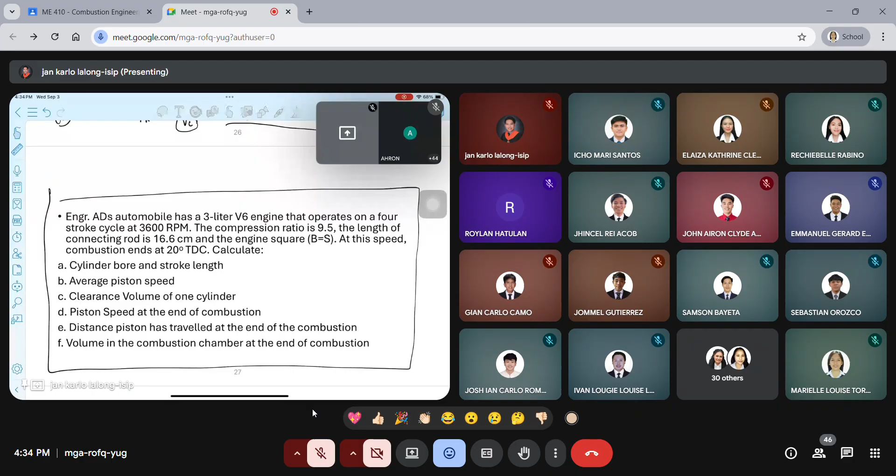Okay, so we have the operating characteristic of reciprocating internal combustion engine. Before we proceed with the analysis ng ating internal combustion engine, una muna nating aalamin ano ba yung mga important parts, ano yung mga parts and terminology na dapat alam natin so that we can easily read kung ano yung mga formula natin gagamitin kapag pinag-usapan natin ang internal combustion engine.

Okay, so let's start. Ang ating mga terms na alamin is in our piston cylinder. Yung ating combustion is nangyayari sa ating piston cylinder, dito nagaganap yung ating combustion, kaya naman this will be the focus ng ating discussion. Okay, so una natin is the bore. Yung bore natin, yan yung tawag sa inner diameter ng ating engine cylinder. Kung makikita natin yung ating engine cylinder, ang bore niya ay yung diameter niya.

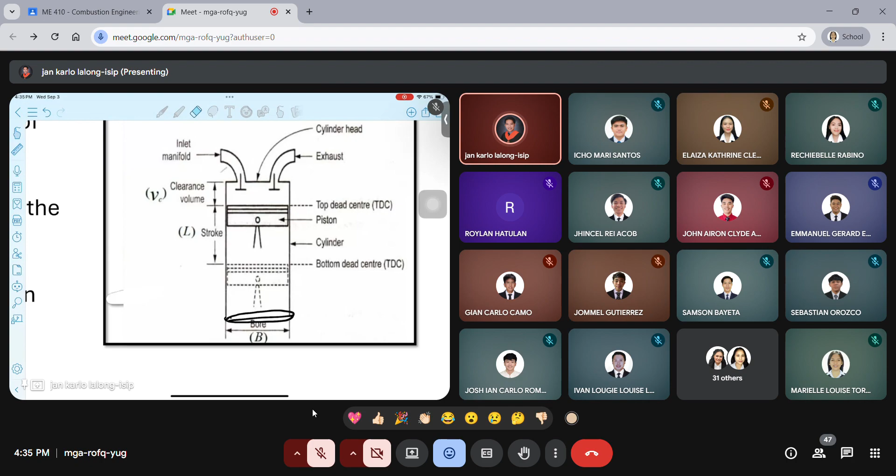So 'di ba cylinder 'yan? Kung ano man yung diameter niyan, yan yung tawag natin diyan ay bore. Naintindihan naman yung sa bore, na-visualize yung ating bore. Basta yun yung ating diameter nung cylinder natin, inner diameter. So it is measured inside ng ating piston cylinder.

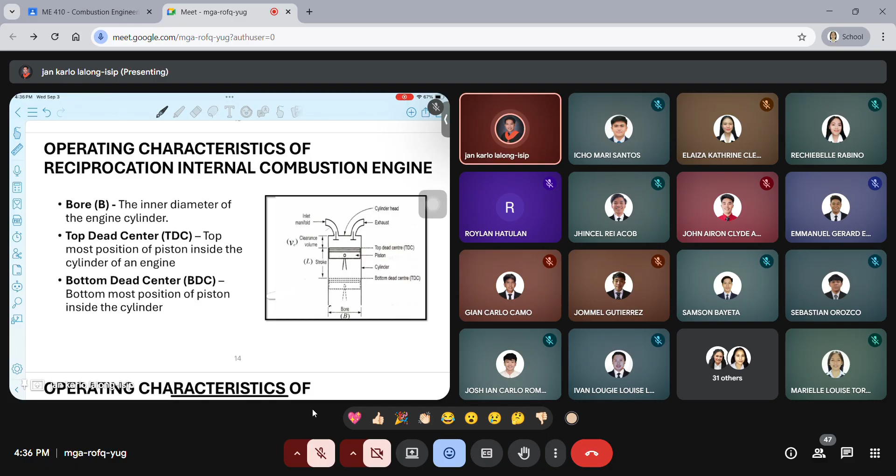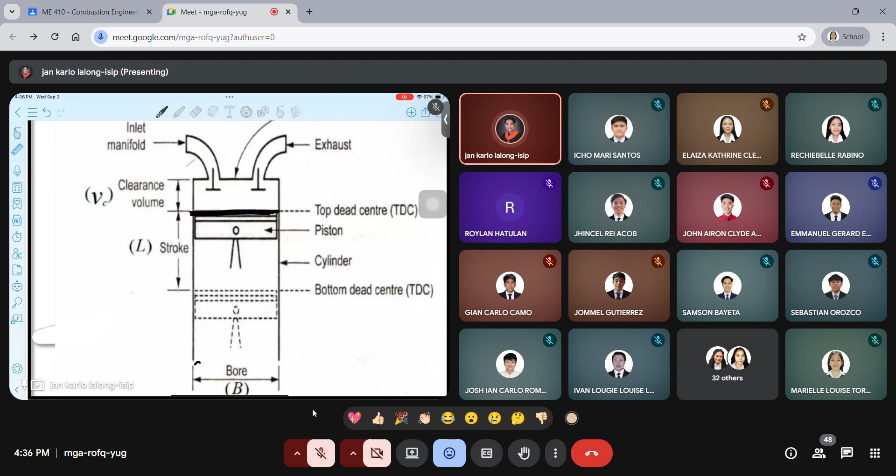Okay, so next nating term, we have the top dead center. Pag sinabi nating top dead center, that is the topmost position ng piston inside the cylinder of an engine. Ganito yung ating piston cylinder, and then we have 4-stroke: intake, compression, power at saka exhaust. Kapag yung ating piston is at top, nasa pinakasagad, topmost position natin, nare-reach yan during compression and our exhaust stroke. Kapag nandyan yung position niya, that is called our top dead center, that is the TDC position.

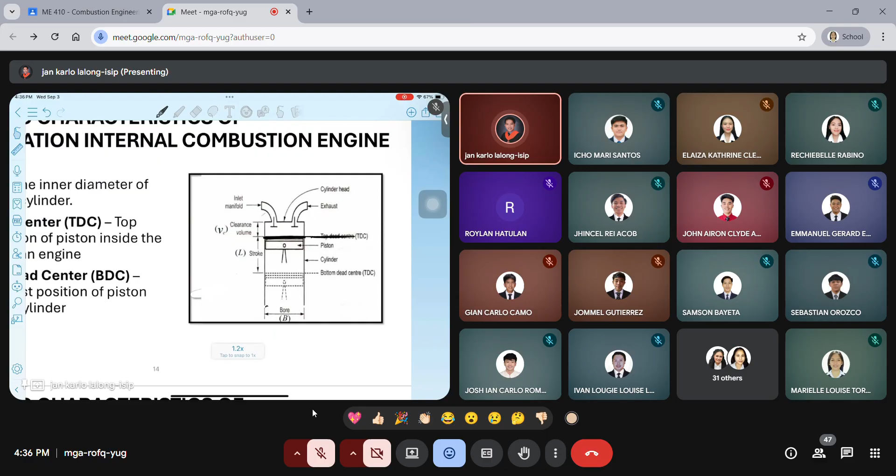At the same, with our bottom dead center, yung pinakamababang point ng ating piston, that is the bottom dead center position. Okay, so with that, clear ba tayo dito sa ating tatlong terminology? We have the bore, the top dead center, at saka yung ating bottom dead center. Okay, so proceed tayo sa next.

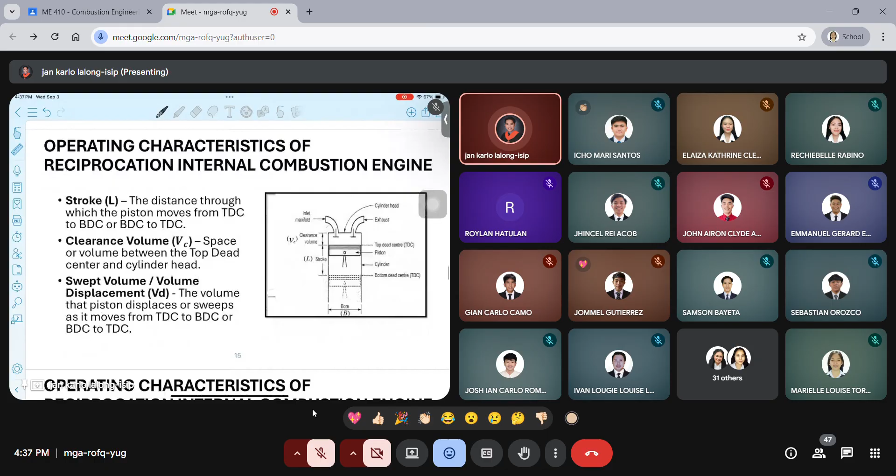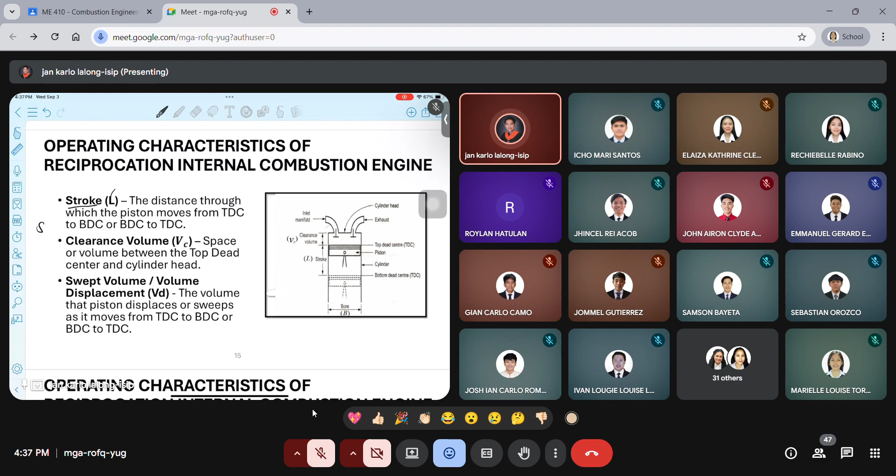Yung ating sunod naman is stroke. Ang ginagamit natin dyan is L na nomenclature, but then other references ginagamit is S. Kung papansin nyo dun sa ating lecture notes, minsan L yung gamit, minsan ay S, but that's just the same naman. Just analyze the problem para makita natin kung ano man yung sinasabing yun, that is the stroke. Sabi dito, the stroke natin, that is the distance through which the piston moves from the top dead center to the bottom dead center.

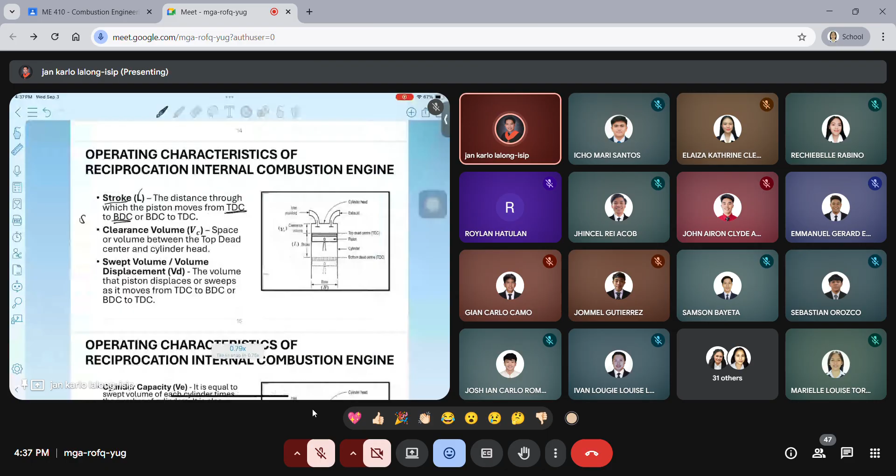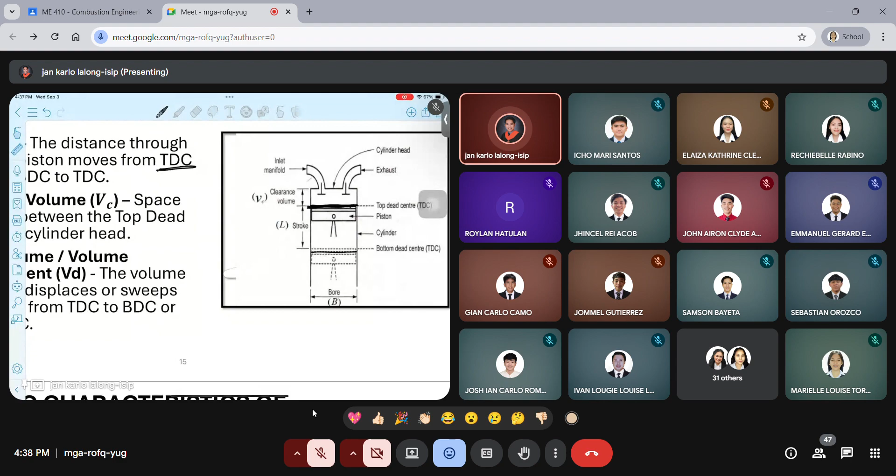Okay? So that is the distance ng ating top dead center, yung position ng ating piston at top dead center at saka sa bottom dead center natin. So itong distance na ito, that is our stroke. Okay, naintindihan naman yung ating stroke, that is the distance from the top dead center to bottom dead center.

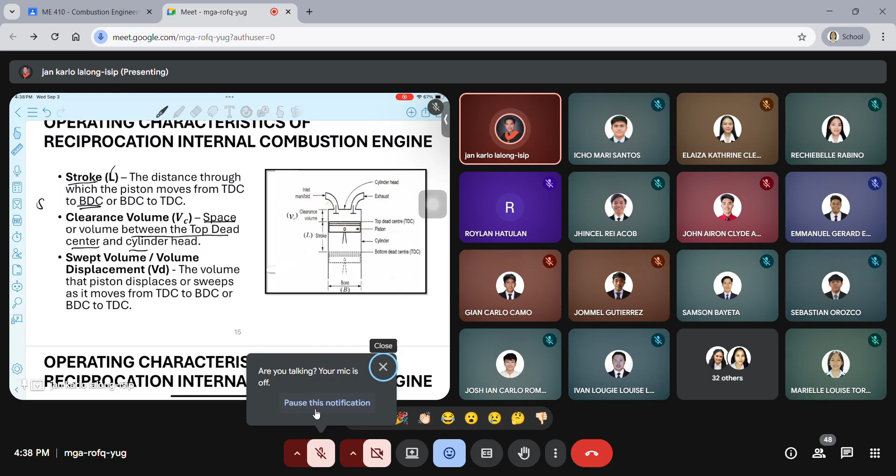Okay, so next natin, we have our clearance volume. Ngayon tayo'y nag-uusap about the volume ng ating cylinder. Pag sinabi natin clearance volume, yan yung space or the volume between the top dead center and the cylinder head. So at top dead center position, yung ating volume dito from the top dead center papunta sa ating cylinder head, itong part na to, that is called our clearance volume, ang tawag dyan ay clearance volume.

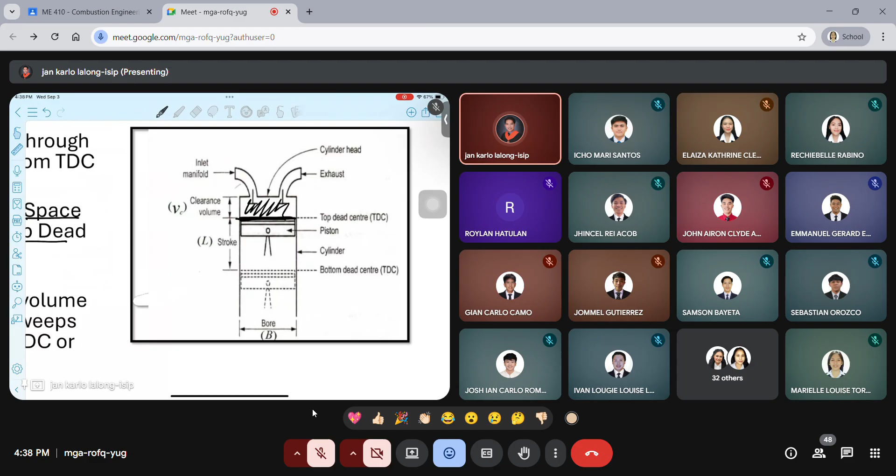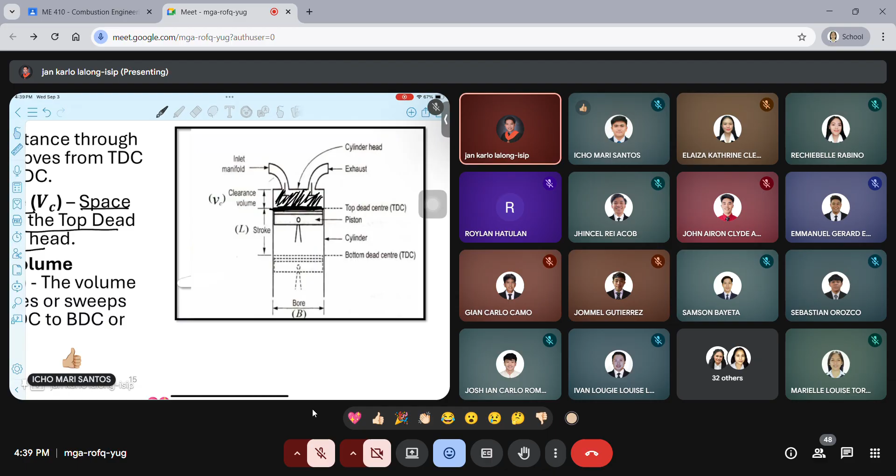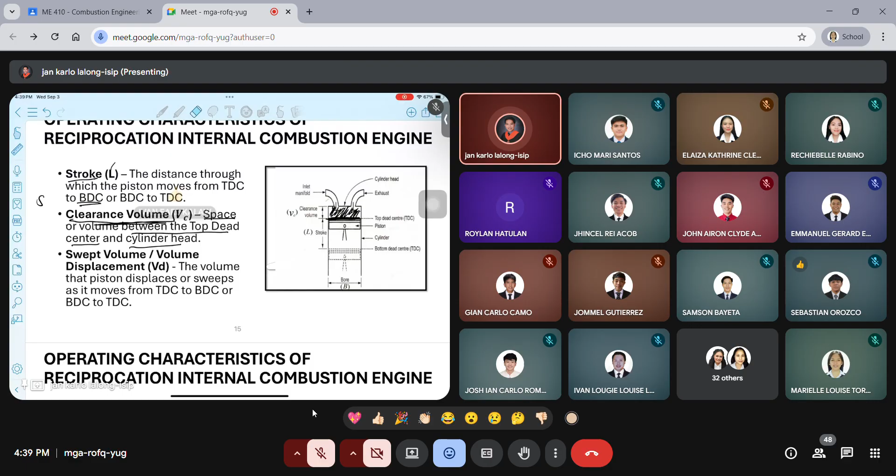Yan, 'di ba? That is the topmost position. So masasabi ba natin na ito na din yung ating minimum volume? Kindly react if you agree. This is our minimum volume. At syempre yung ating clearance volume, that is our minimum volume. So next naman natin, we have the swept volume or our volume displacement.

Mas ginagamit yung ating volume displacement, kaya let's just use that term. Yung ating volume displacement or the V sub d, that is the volume that piston displaces or sweeps as it moves from the top dead center to bottom dead center. So yun daw yung ating volume from our top dead center papunta sa ating bottom dead center. Itong area na to, o yung volume na to, yung space na to, that is called our volume displacement. Okay, so with the definition ng ating dalawang volume na yan, ngayon, how can we get yung ating total volume ng cylinder?

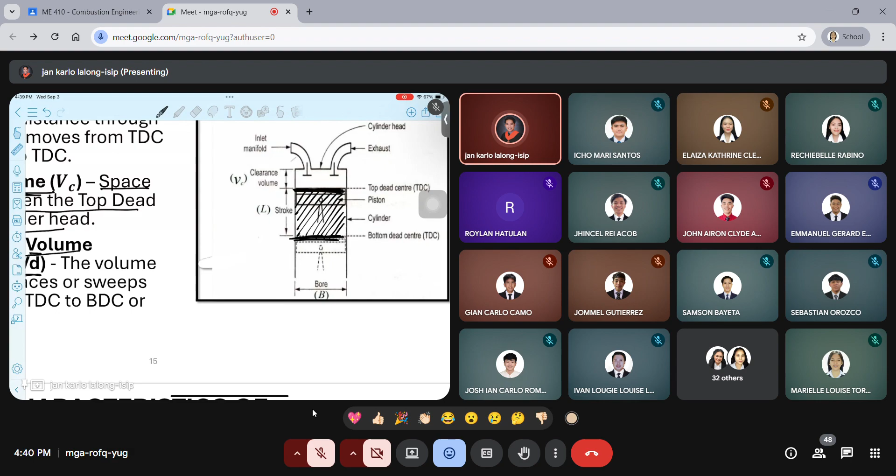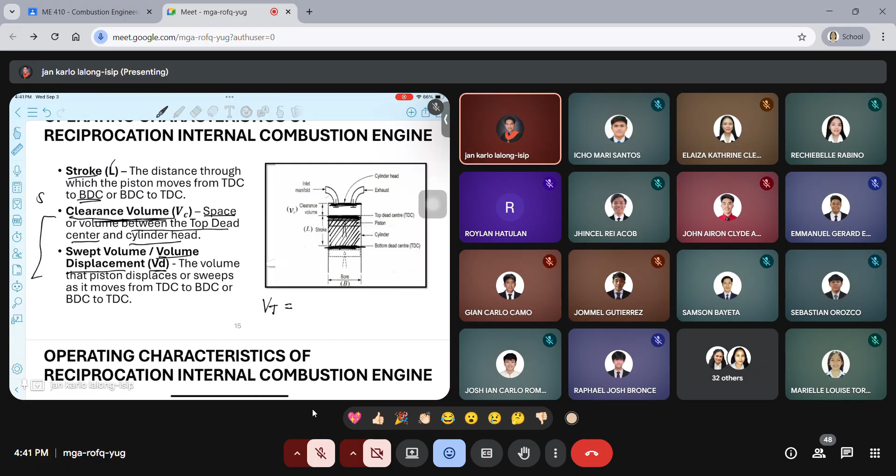Okay, so ano kaya yung ating formula? Paano kaya natin makukuha yung total volume ng cylinder given these two values, yung two volumes natin? Hindi, we're talking about volume. So again, yung ating clearance volume is top dead center hanggang sa cylinder head. And then, yung ating volume displacement from the top dead center hanggang sa ating bottom dead center. Ngayon, pagkukunin naman natin yung ating volume ng buong cylinder. Siyempre, i-add lang natin. We're going to add yung ating clearance volume at saka yung ating volume displacement.

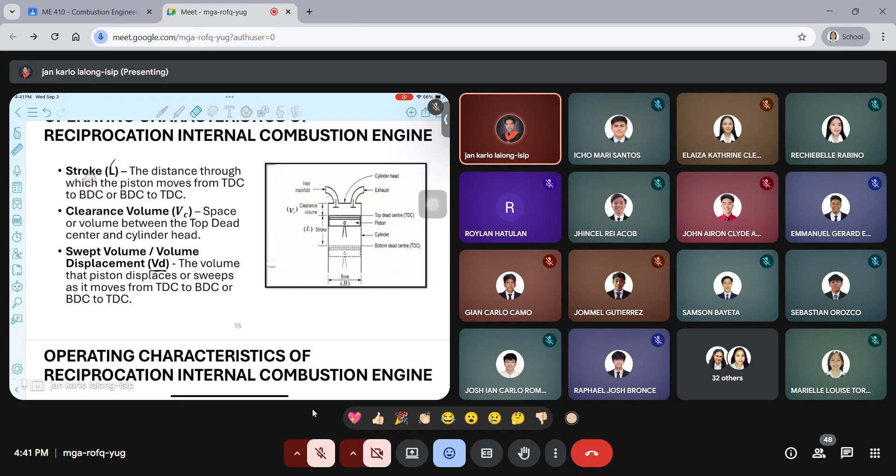Well, so you should study those terms kasi sa problem natin hindi naman basta ginigiven yan. You should analyze ano ba yung sinasabi ng ating problem. Okay, so are we clear with that? Naintindihan na yung ating clearance volume at yung ating volume displacement?

Ayan. Okay, so next term tayo, we have the cylinder capacity. So yung cylinder capacity naman natin, that is our V sub E. So it is equal to the swept volume of each cylinder times the number of cylinder. So again, yung atin namang internal combustion engine, hindi lang naman isang piston cylinder yung gumagana diyan, di ba?

So madami yung ating piston diyan. Madaming gumaganang piston cylinder diyan. So hindi lang isa yung ating gumaganang piston kapag ang pinag-uusapan natin is yung engine, especially yung ating mga sasakyan, hindi lang isa yung piston yan. Meron pa nga 6 and more.

And so, yung ating cylinder capacity, that is the total volume. So, ang gagawin natin, pag nakuha na natin yung ating volume displacement, ito times lang natin yan kung ilan yung cylinder ng ating engine. Para makuha natin yung cylinder capacity.

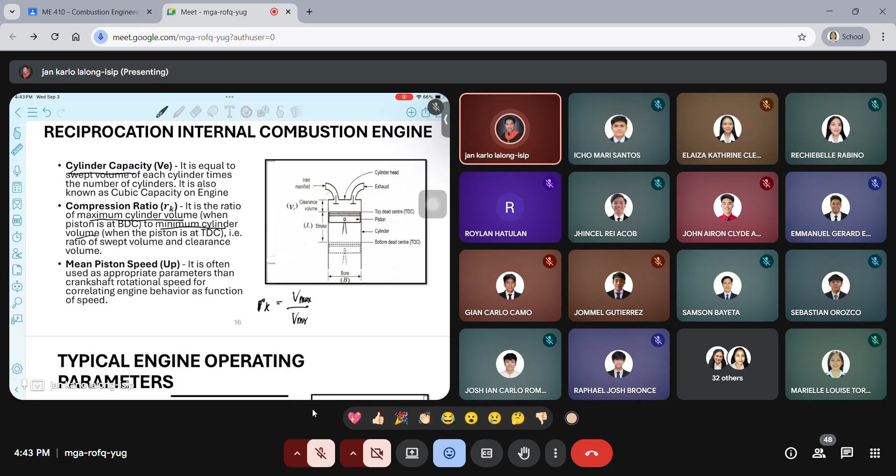Okay, so next natin, we have our compression ratio. So sabi dyan, yung ating compression ratio is the ratio of the maximum cylinder volume to the minimum cylinder volume. So sabi, yung atin daw compression ratio is equals to our maximum volume over minimum volume. So ano yung equivalent natin? Using yung ating napag-aralan na terms. We have the clearance volume, volume displacement. Ano nga ulit yung ating magiging value for the maximum volume?

Try muna natin si Hatulan. Nandito ba? Hello po. Audible po ba? Audible. Total volume over clearance volume po.

Hindi. Yung maximum volume natin, paano natin siya i-dissect? Paano natin malalaman na that is our maximum volume? Total volume. Okay, so yung total volume natin, that is, again, VC plus VD. Tama? And tapos, ang minimum volume natin ay, ano ang sabi mo? Clearance volume po. Clearance volume. Ayan. So, ayan, magagamit din natin yan sa pag-analyze ng problem. You should know na yung ating compression ratio is equals to our VC, clearance volume plus our volume displacement over our clearance volume, or that is the maximum volume over our minimum volume.

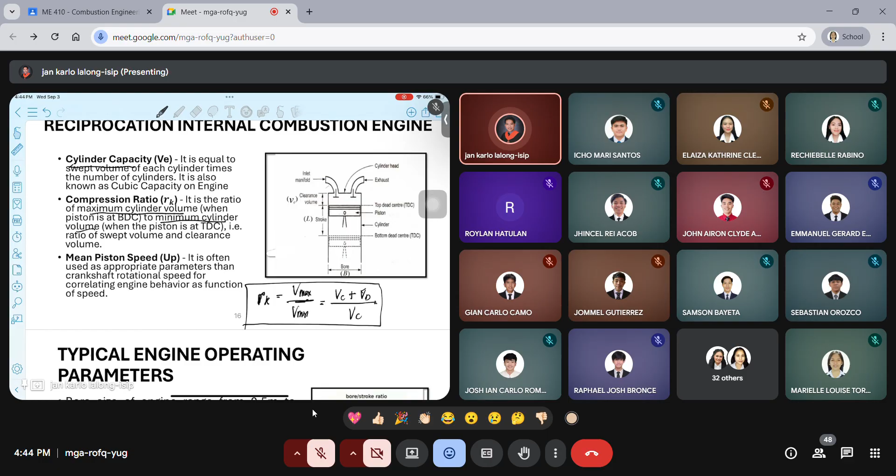Okay, so next natin, we have our mean piston speed. Yung ating ginagamit na nomenclature dyan is U sub P. But then kapag mean piston speed, that is U sub P. But then pag sinabi nating mean, lagyan natin ng bar. So, U sub P bar kapag mean piston speed. So it is often used as an appropriate parameter than the crankshaft rotational speed. So mas ginagamit natin yung piston speed kaysa dun sa speed ng crankshaft. Kasi syempre mas actual kapag yung piston yung ating i-measure na speed.

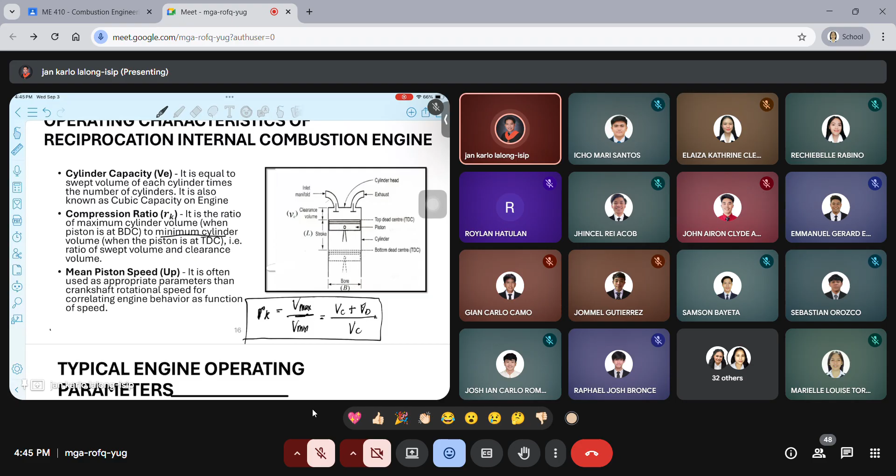Okay, so are we clear na with these three terms? We have the cylinder capacity, compression ratio, and the mean piston speed. Naintindihan?

Okay, so now let's have the typical engine operating parameters. This is the typical engine we see in the market. The bore size of the engine ranges from 0.5 meters to 0.5 centimeters - that 0.5 meter is too large already. So that's the range of our cylinder bore sizes. How big would the engine be if the cylinder alone is 0.5 meters? That is for heavy equipment, for the large equipment being used. That is 20 inches to 0.2 inches.

So the ratio of our bore to stroke, S is used here, that is also equal to our bore over L, which is also our stroke. For small engines, our ratio of bore to stroke should be 0.8 to 1.2. So for our small engines, the ratio should be around that. That is probably used for the efficiency of our machine, and the movement of our piston depends on that.

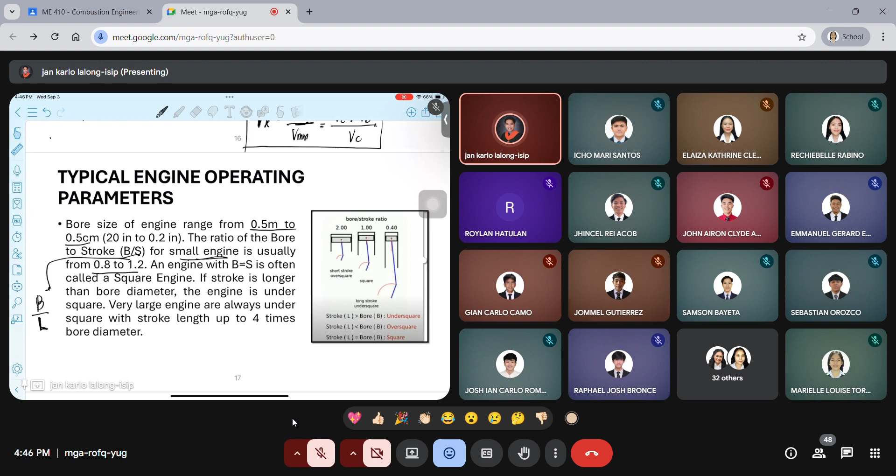So when our engine's bore and stroke are equal, that is called a square engine. When our stroke is larger than our bore, that is under square. When our stroke is less than our bore, that is over square.

So for our very large engines, they are always under square. When designing combustion engines for large heavy equipment, we use under square, with a stroke length up to 4 times our bore diameter. So our stroke is much larger than our bore, up to 4 times.

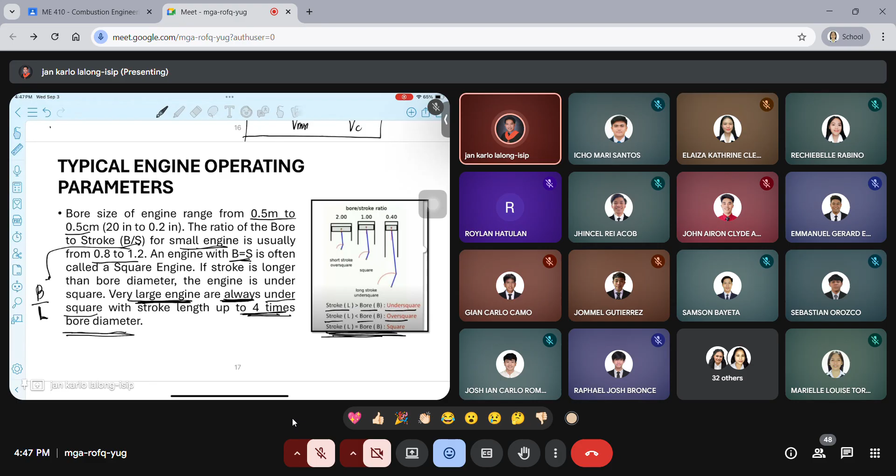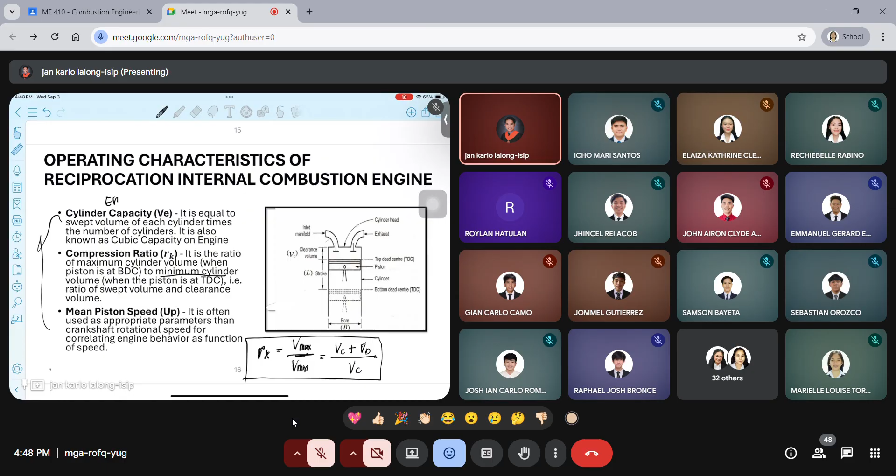Okay, so are we clear with these typical engine operating parameters? Did you understand our under square, over square, and square engine? You should remember those terms, especially for our formulas later because we are going to use that. So we have the bore, the top dead center, bottom dead center, the stroke, the clearance volume, volume displacement, the cylinder capacity - this is also called the engine capacity - the compression ratio, and the mean piston speed.

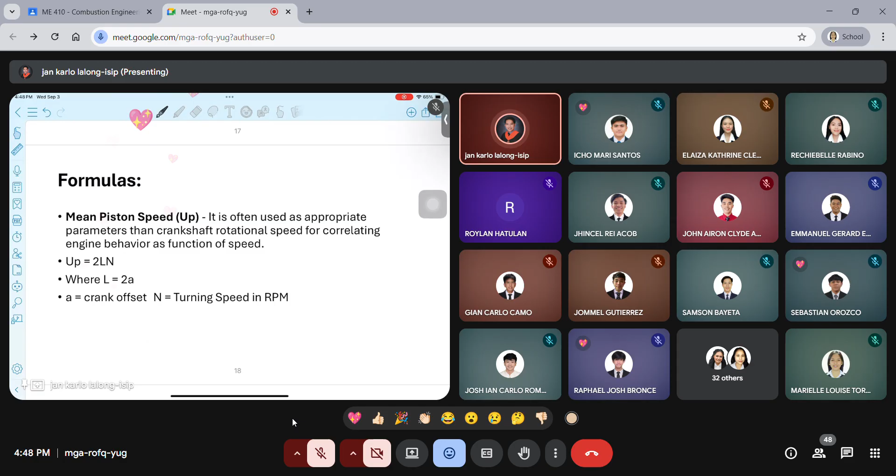Okay, so let's proceed with the formulas that we are going to use. Please highlight these in your lecture notes since you already have a copy. I started with this one, but it's near the end - our mean piston speed. The mean piston speed is often used as an appropriate parameter, rather than crankshaft rotational speed, for correlating engine behavior as a function of speed. So our formula there is 2LN.

Our L is our stroke, and our N is the engine speed.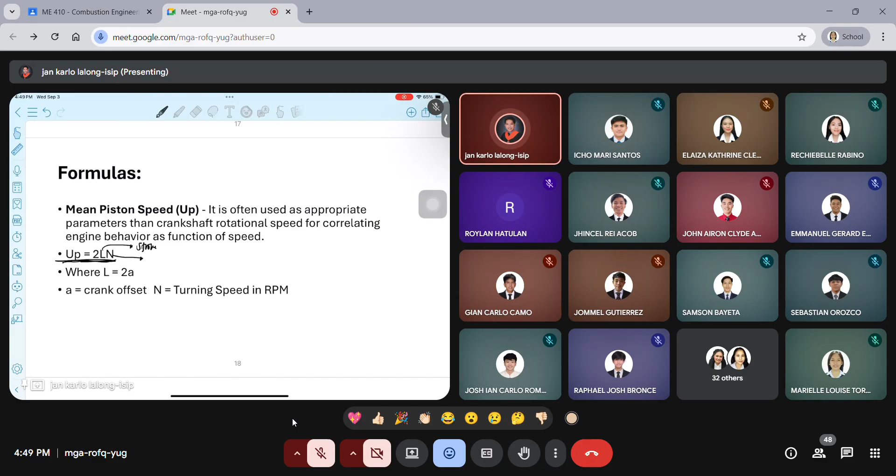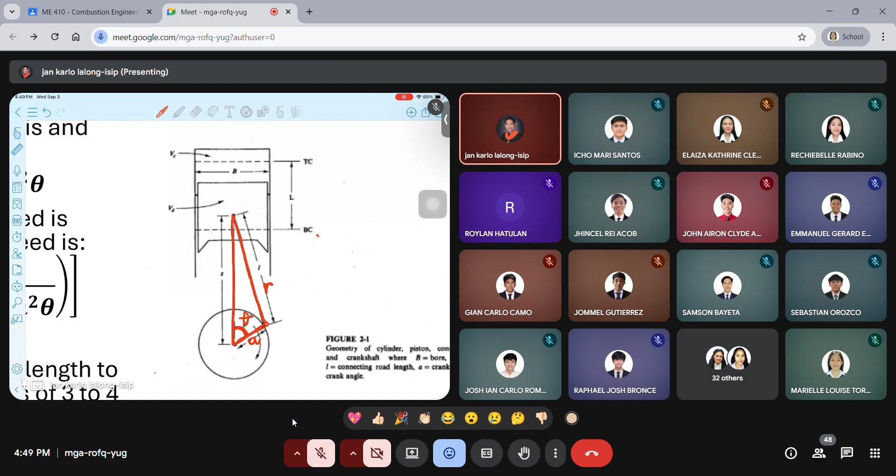Okay, so if our stroke is not given, we can get that by 2A. What is our 2A? If you look at our schematic diagram of the piston cylinder, we have these parameters - this is our A, this is the crank angle theta, and this is our R. So if L is not given, we can use the value of 2A, or 2 times the length of our crank. N is the turning speed in RPM.

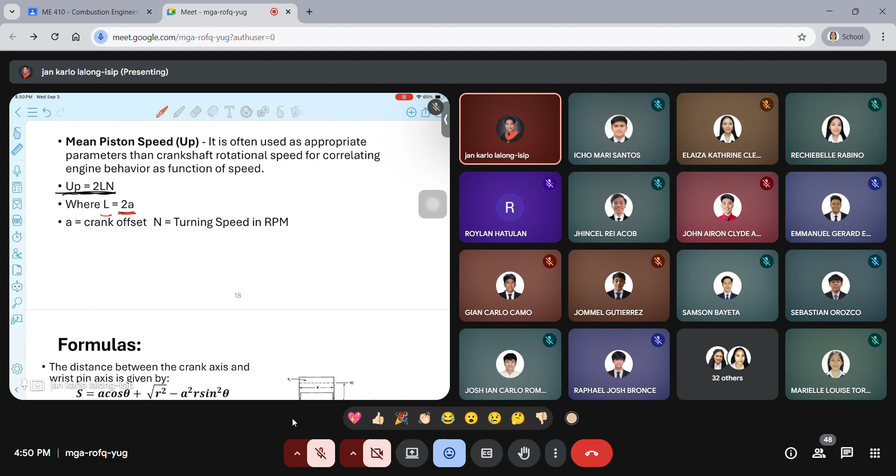So that is the formula for our piston speed. For mean piston speed, it's the same formula, U sub P bar.

The distance between the crank axis and the wrist pin axis is given by this formula - that is the distance from our wrist pin to our crank axis, this being our crank axis. If we measure this distance at any point given the crank angle, our formula is A times cosine theta plus the square root of R squared minus A squared sine squared theta. Our R there is our connecting rod.

Okay, and then the ratio of instantaneous speed - this is our speed at a given point, and this is our mean piston speed.

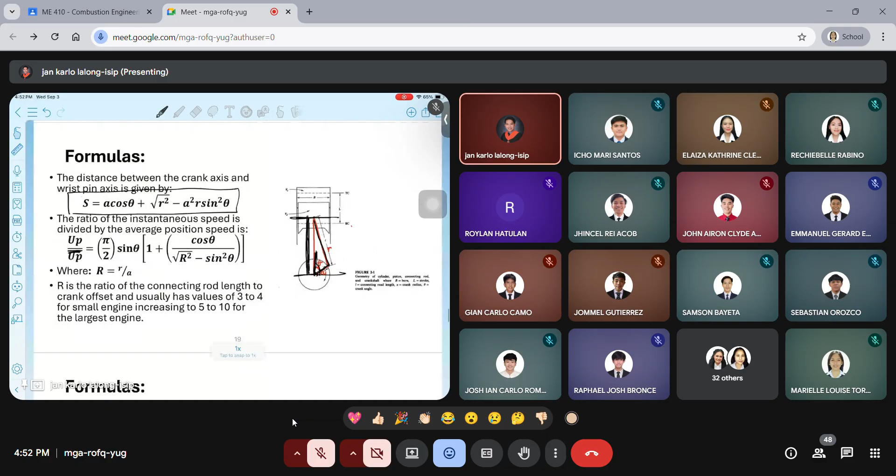Hindi ko kasi na-type yung formulas, dapat may bar yung nasa baba. That is the mean piston speed, equals to pi over 2 sine theta times 1 plus cosine theta over square root of r squared minus sine squared theta. Yung r natin, that is equals to r over a. Yung r natin is our connecting rod, at yung a natin is our crank. Yan yung ating formula para sa crank distance, crank to wrist distance, at ratio of instantaneous speed.

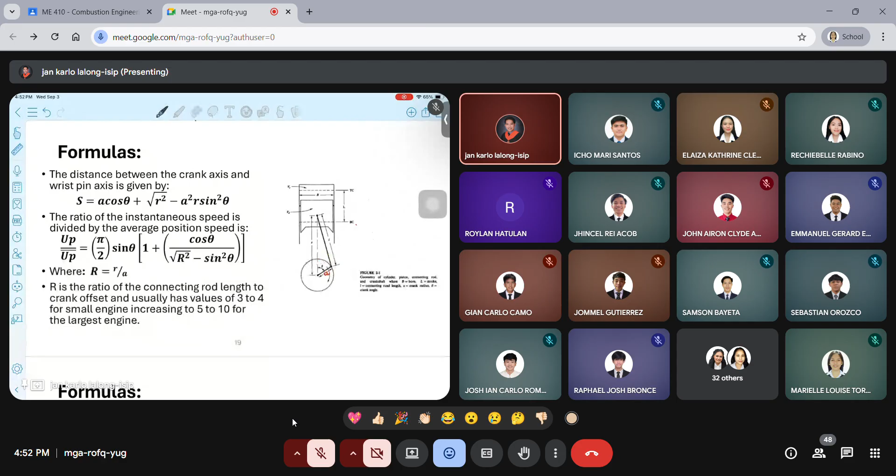Next natin, we have the displacement volume. Para makuha natin yung displacement volume, equals to the maximum volume natin or the volume at bottom dead center, minus our clearance volume, yung ating top dead volume at top dead center. Aside from that, makukuha din natin yung volume displacement using yung formula ng pagkuha ng volume ng cylinder, which is pi over 4 d squared times the height. Syempre, ibahin lang natin ng konti yung formula kasi may ibang terms tayong ginagamit.

So we have pi over 4. Ang diameter natin, that is the bore. So that is pi over 4 b squared times our length, or yung ating stroke, yung ating height. Kapag binigay yung number of cylinder natin o tinatanong tungkol sa number of cylinder, ita-times lang natin kung ilan yung ating cylinder.

Pwede din natin makuha yung volume, yung cylinder volume natin, at any crank angle, hindi lang tuwing top dead or bottom dead center. Makukuha natin yan gamit ang formula na ito: clearance volume plus pi times the bore squared over 4, times R, A, S. Yung R natin, connecting rod; A natin, crank; at S natin, yung result ng formula na ito. Clear na ba tayo dito sa ating apat na formula?

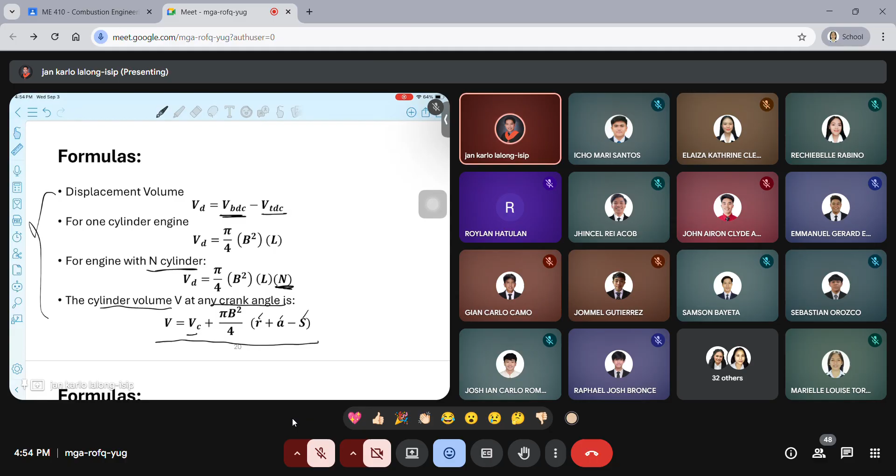Class, later on, gagamitin natin yan sa problems. Kapag pinractice natin ito, mas madali din nating mamamaster yung mga formulas na yan.

Proceed tayo with the cross-sectional area. Pag cross-sectional area, we have the surface area of the flat top piston, which is pi over 4 times b squared. Pag naman yung buong combustion chamber, yung kukunin natin ay ACB, yung surface area of the cylinder head. Hindi siya same, mas malaki ito kaysa sa surface area ng piston.

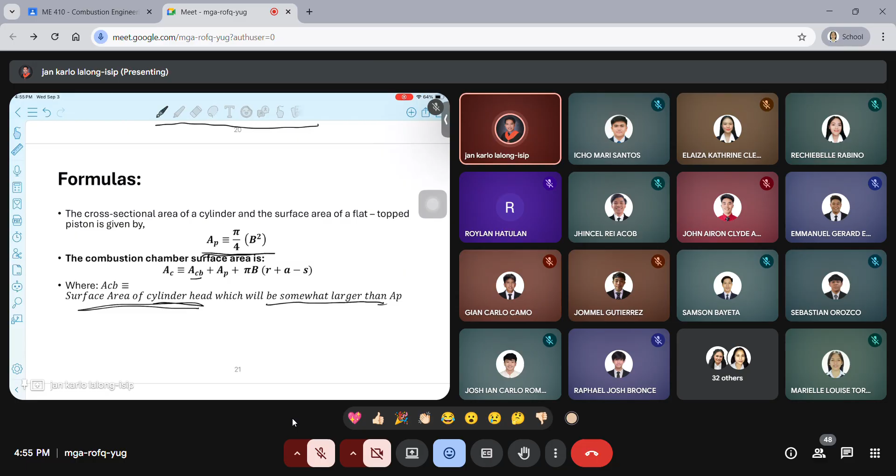Kasi di ba, we have our cylinder and then we have our piston. Para makagalaw yung piston, dapat meron tayong space dito, kaya mas malaki yung ating cylinder head kaysa dun sa ating piston diameter o surface area.

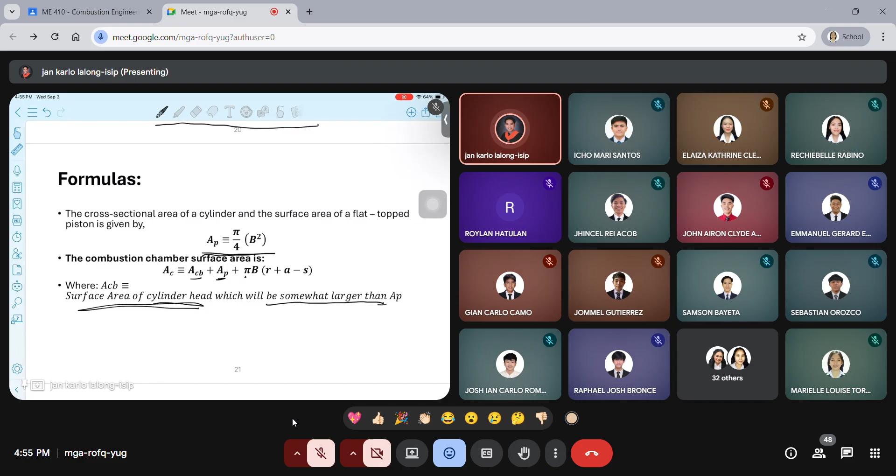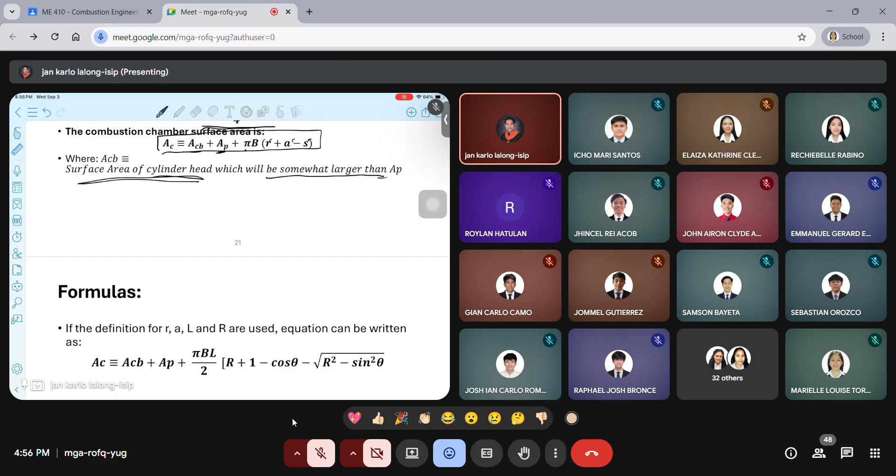ACB plus AP plus pi times the bore, times R plus A minus S. Yun pa rin naman yung ating mga formula, sinimplify lang o pinahaba gamit ang ibang formulas para sa S, A, R, at L. Ito yung ating mas direct substitution na formula. Clear na ba tayo sa mga formula? Naintindihan naman kung saan siya ginagamit?

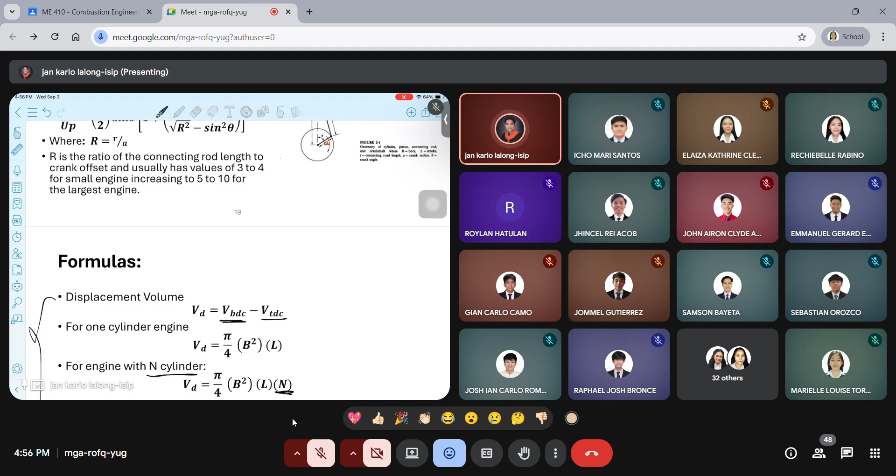Okay, so we are going to solve sample problems para mas makita natin kung paano natin gagamitin yung ating mga formulas. Wait lang.

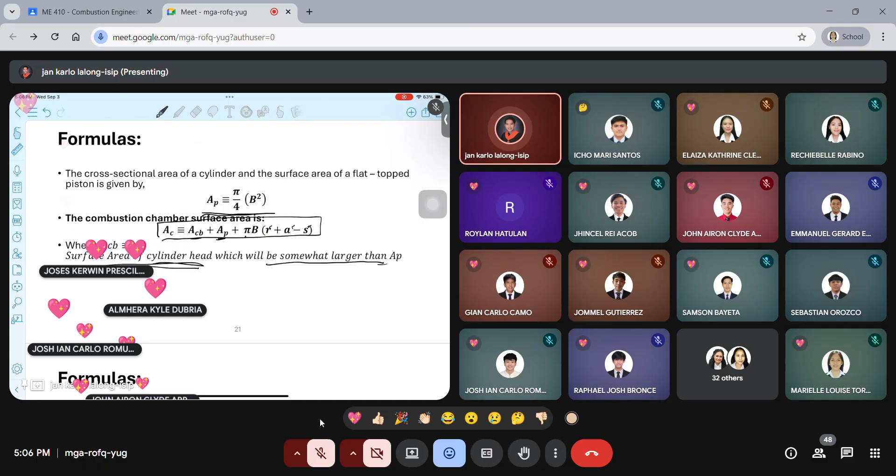So we have this sample problem. Sabi dun sa ating problem, a diesel tractor has a 3 cylinder engine, meaning tatlo yung cylinder natin, and the process natin is our engine is a 4-stroke cycle engine.

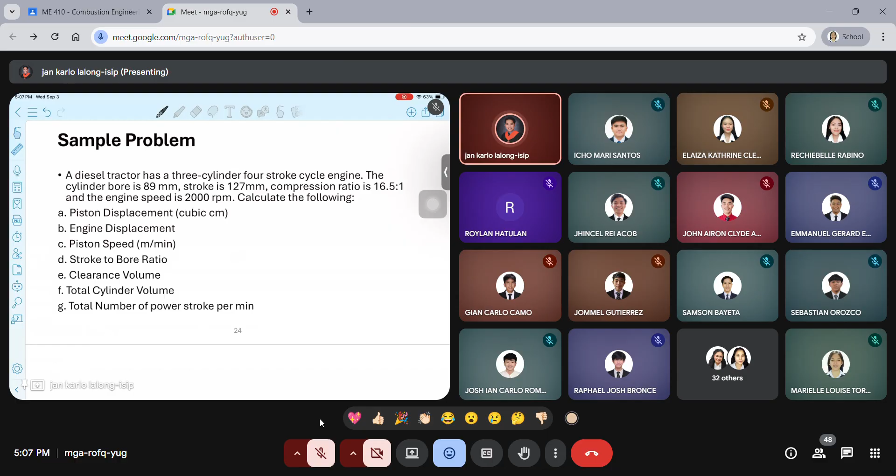And then the cylinder bore is 89 mm. The stroke is 127 mm. The compression ratio is 16.5:1, and the engine speed is 2,000 RPM. So we are going to calculate these unknowns.

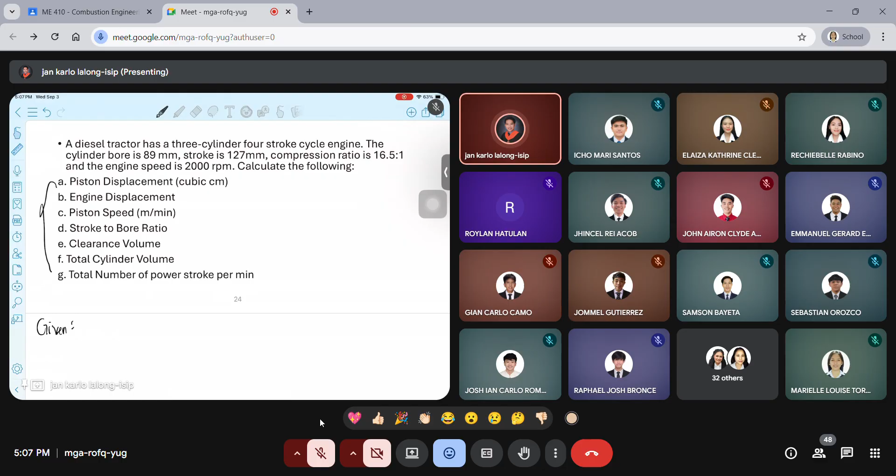Syempre, sabi ko nga sa inyo, dapat yung una kong makikita kapag nagsosolve kayo ng problems is the given. Okay, so yung given natin, sulat lang natin. Yung number of cylinder natin, that is... 3 pala, sorry. And then we have a 4-stroke engine.

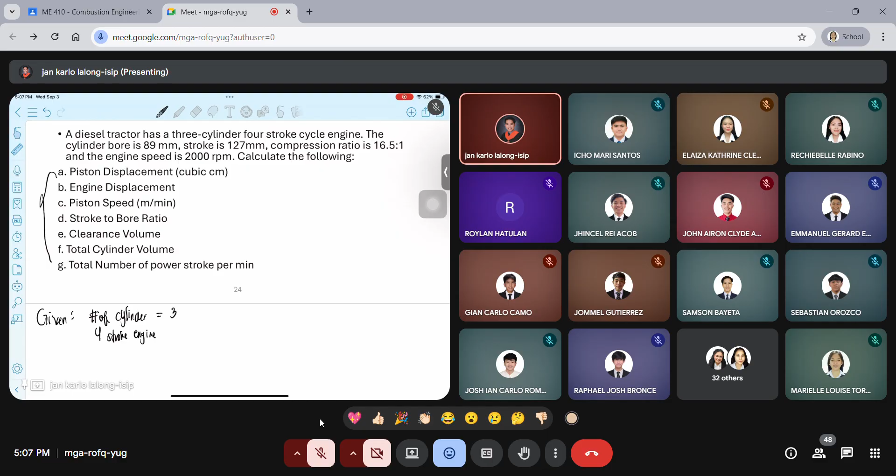And then the cylinder bore, our bore is equal to 89 mm. And then our stroke is equal to 127 mm.

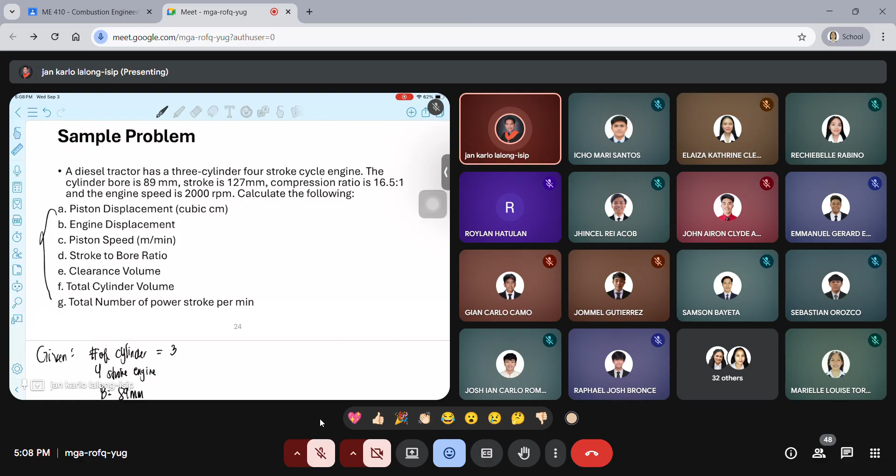I will be assigning where you will upload this. Okay, so our stroke is 127 mm, and our compression ratio, or R sub K, is 16.5. What else is in our given? We have the engine speed, so that is N, at 2,000 RPM. And then after the given, let's have the required. For our required, just write down what's missing.

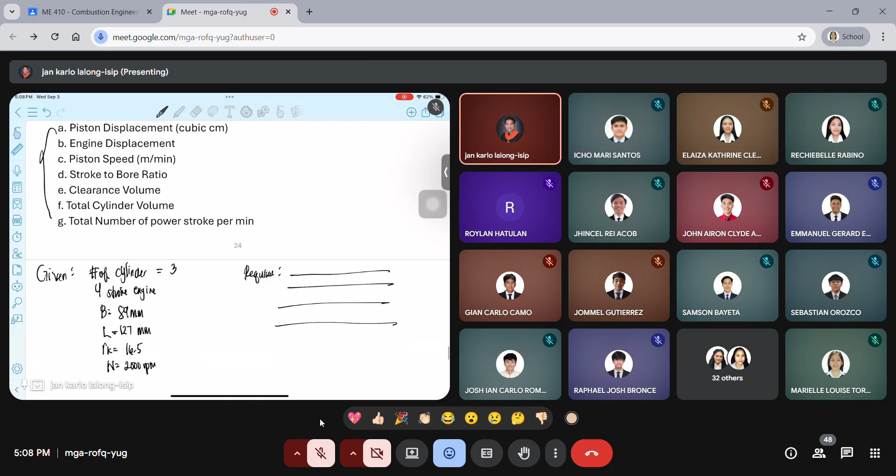Okay, so next is the solution. Let's start with the first one. We have the piston displacement, so our piston displacement, that is our VD. So what again is our formula for our VD?

Wait. Rabino. Sir, pi over 4 times B squared times L, where B is the bore, and L is the stroke.

Okay, so given our bore and our stroke, what will be our value for VD? Let's have Rejuso.

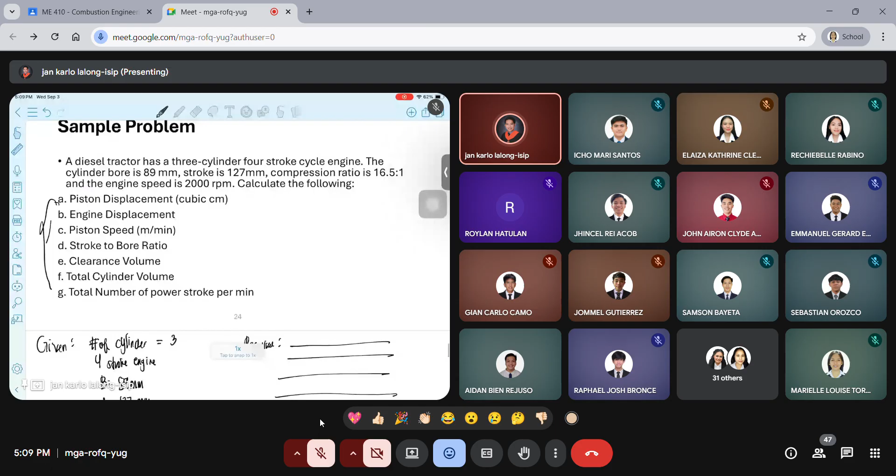So, 79,008.4634. Is that in cubic centimeter? Yes po. So, we have a problem with the conversion, I think.

790 po pala. 790. There, 790. That is the correct conversion.

Excuse me. So we have 790.0846342 centimeter cube. So that is our VD. Same as what the others got?

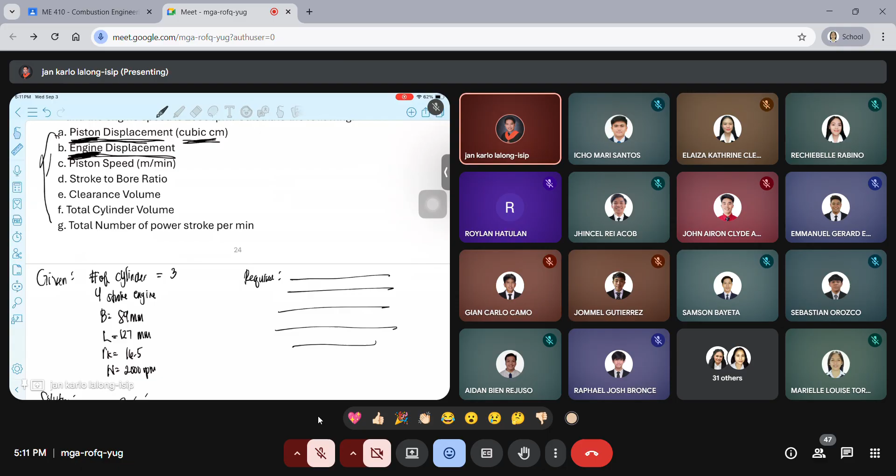Okay, so next, what are we looking for next? We have our engine displacement. So our piston displacement, we are talking only about one piston. But for engine displacement, we are talking about the whole engine already. So how many given cylinders do we have? We have 3 cylinders. So we just multiply to get our engine displacement or the VE. Take our VD and multiply it by the number of cylinders.

Okay, so please compute. What will be the answer? Gutierrez. Sir, all the decimal points. 2,370 point, 2,000... 370. Yes po. 2,370 point. 253,903. 253,903. There. So this is in cubic centimeter.

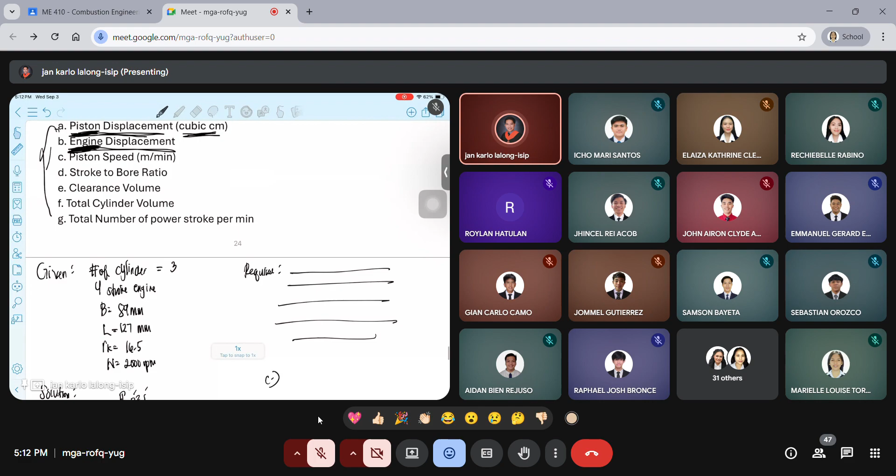So thank you. Next, let's have our third one. We have the piston speed. So again, what is our formula for our piston speed?

Let's have Manalo. Piston speed is 2LN. Equals to 2LN. So given what we need, we have the L and the N. Please compute, Cleofe. 508, then meter times minute over minute. There. Because what we're looking for is in terms of meter per minute.

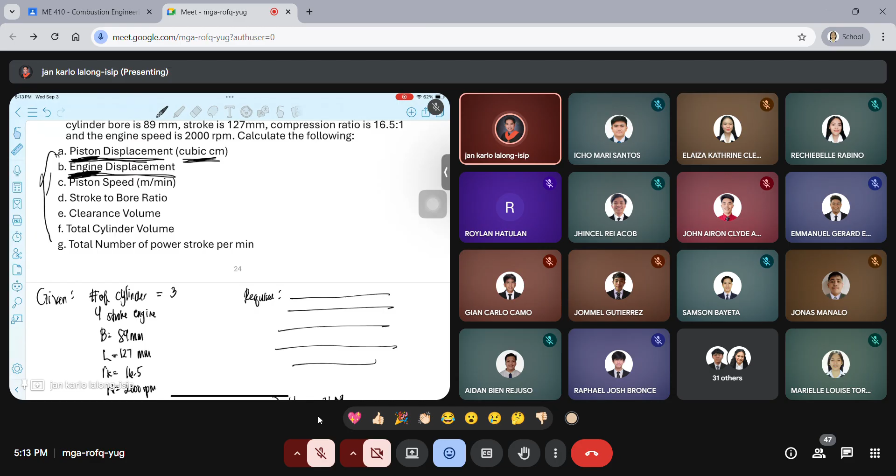And okay, let's move on to letter D. What we're looking for is the stroke to bore ratio. So we have our L over B. Please compute. What do you get there? Marasigan.

Is Marasigan here? There. 1.42696692 po. What's that? 1.4269 66292. 292. There. So that will be our stroke to bore ratio.

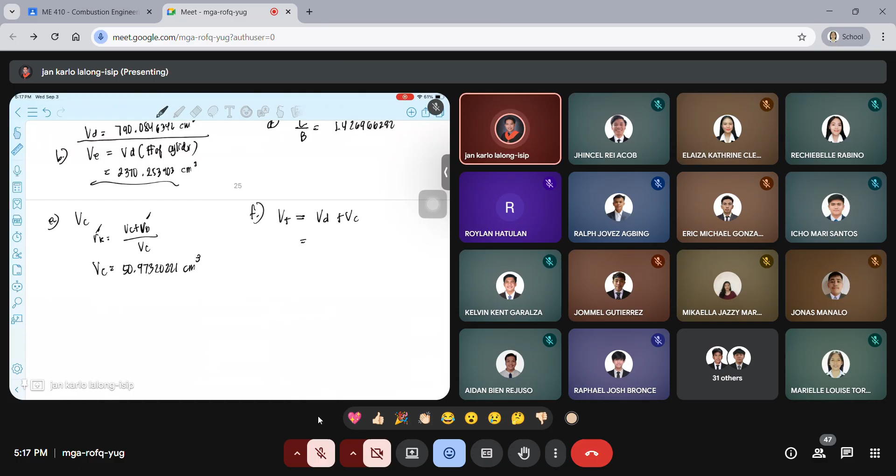Ang total volume cylinder po ay 841.0578. Tama? Okay. Anong unit natin? Meter cube po, sir. Meter cube ba? Centimeter cube po. Centimeter cube or cubic centimeter.

Okay, so lastly, ang hinahanap nating sunod is our total number of power stroke per minute. So we have the power stroke per minute. Okay, so bago natin i-identify yan, in a 4-stroke cycle natin, ilan ang power stroke?

Areola? Ilan kaya ang power stroke sa ating 4-stroke engine? 2. Ano yun? Ayun nga po yun, sir. Sa ating 4-stroke engine, ilan yung power stroke? Final answer na po ba? Hindi. Yung, di ba meron tayong 4-stroke engine? So, ilan doon yung ating power stroke?

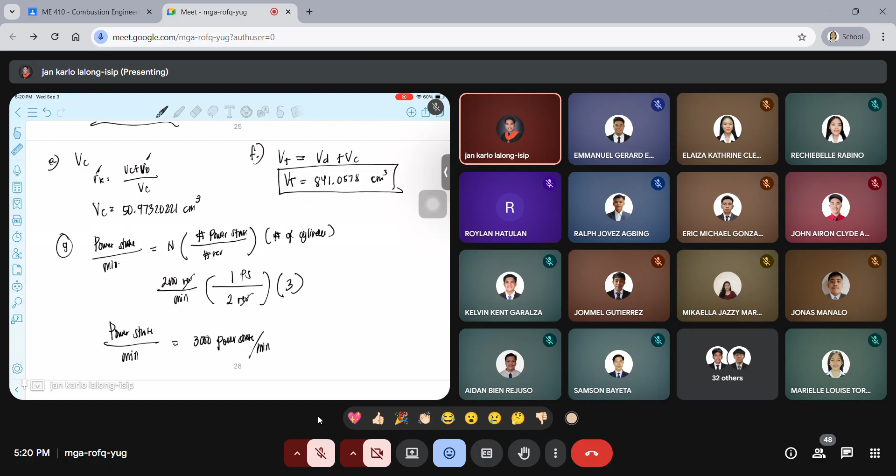Okay, so are we clear with our sample problem number 1? Naintindihan?